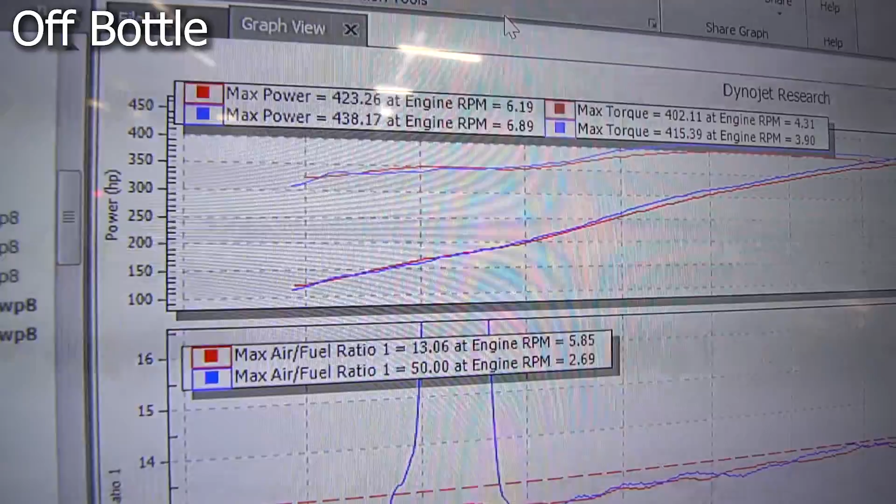101 correction versus a 108. Holy, that's a lot, huh?

Wow, that's nuts. That's why I kept telling him when he dropped it off, I was like, pretty sure it's cold. If you make 15 over what you did before, be happy.

Oh yeah, is this 102 different? Well, look at this.

What am I looking at? Look at the run conditions. Oh yeah, it's like 30 degrees warmer.

That's a solid, that's kicking in. Wow, that's 2 manifolds, that's so crazy though. How, like right here, it's still not making as much as my Camaro LS6. Doesn't make any sense whatsoever.

My car just better keep this trend up when the blower goes on. 700 horsepower, I mean it gets you in the torque. He gives you the torques in the low RPM.

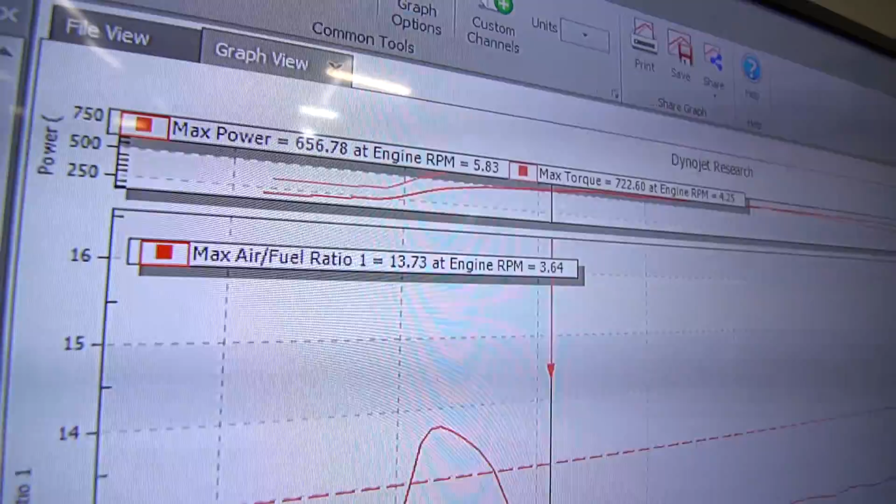This is a good little nitrous can.

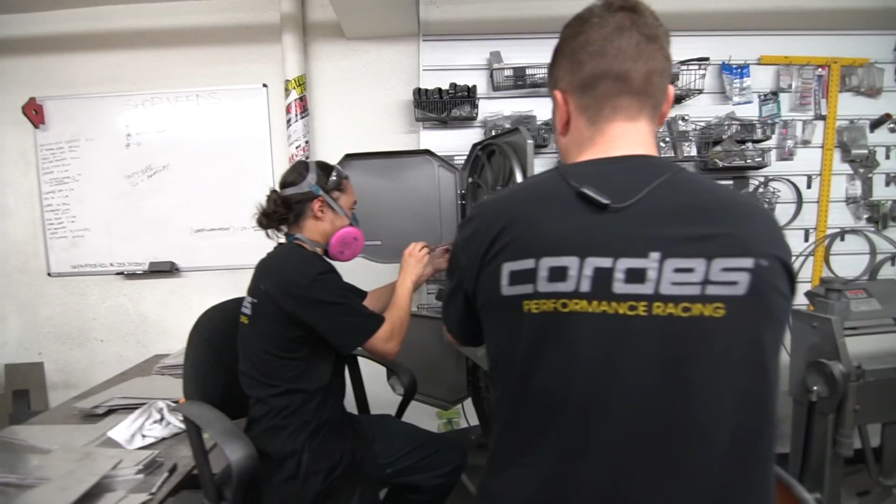This your last batch for a while? Probably not. Yeah, as soon as you make them, they sell out.

I got 10 Trackhawk tanks to make next, and 10 V3 expansion tanks to make next. It's nuts.

You going up the coaters? As soon as I pressure test them all. Gotcha.

Drive this thing. Why is this one so special again, Joe? I don't get it. So this is Eric's second car we're building for him. Bone stock, we secured the car for him. Basically, he said he wanted to do another project.

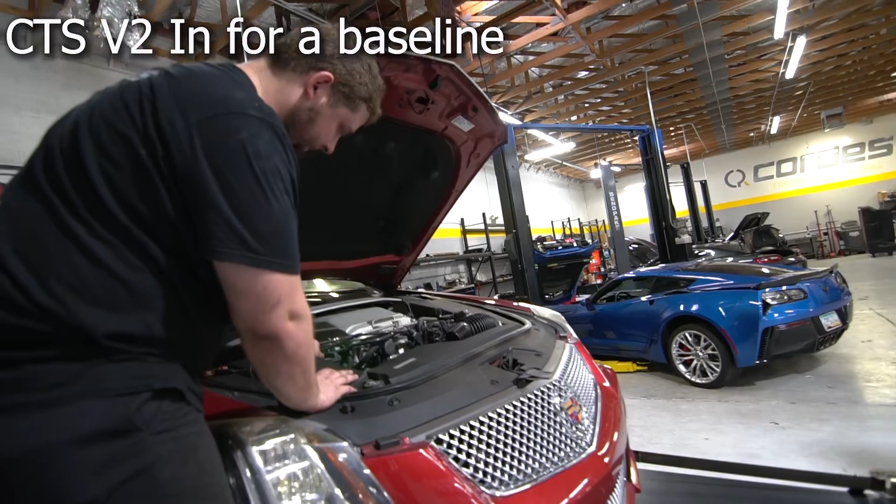This one going full send or whatever? Yeah, it's got 50K on it. Wow, heads, cam, ported blower.

Well, the good news is it's just as easy as a manual, so.

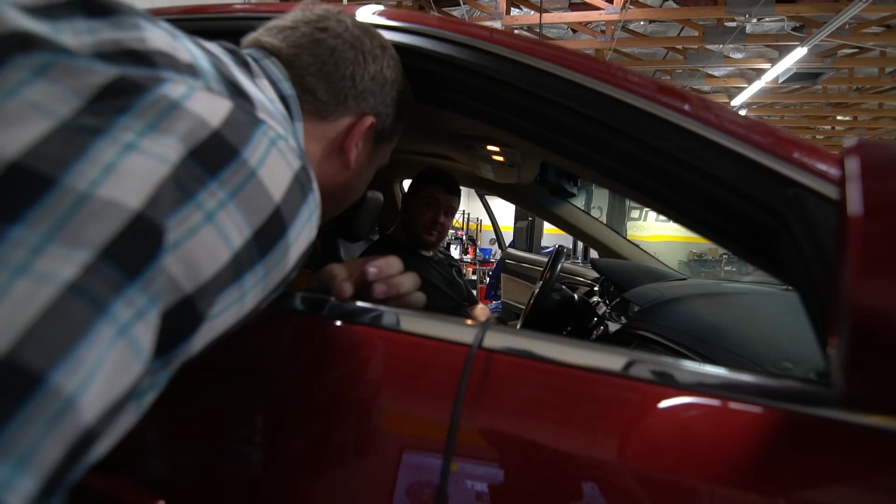Now you put it in sport mode and just upshift into 4th gear. Green button go, red button stop. And make sure you have the traction.

Let her read, bud! I'm gonna go to 180 miles an hour. She's chooching, man.

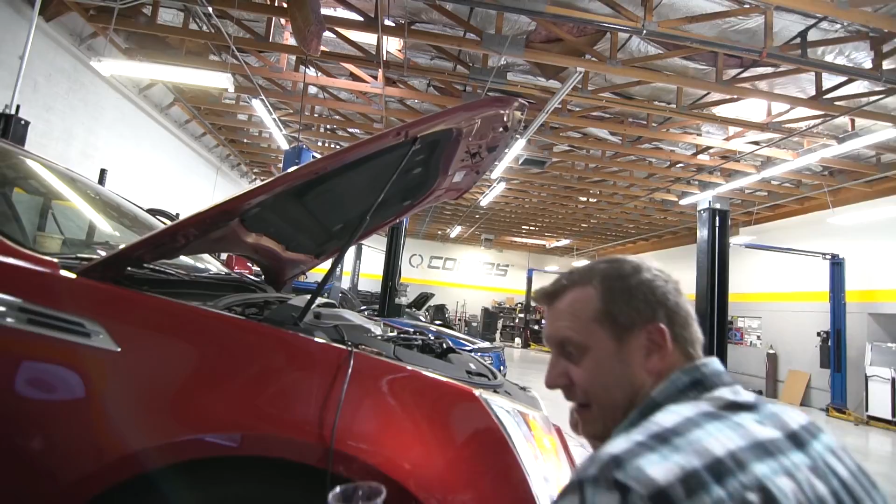Jumping around? Yeah, okay, try that. Center button.

So just turn it on, hit the red button to turn the brake off. Upshift into fourth, get it around 1500 RPM in fourth gear. Hit the green button and stab it. Then when you get up to the rev limiter, hit the red button and start upshifting.

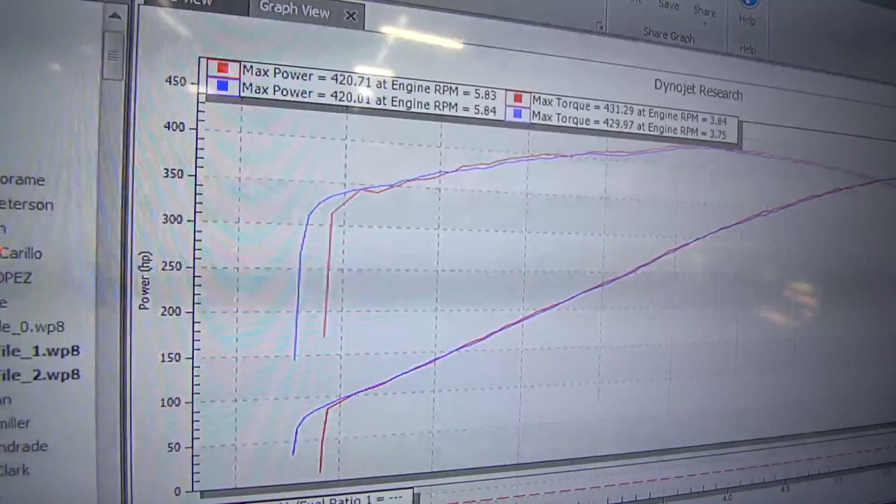Tom's first dyno. What? Tom's first dyno. Not first? Auto. Oh, first auto dyno. I did a C6 a while ago.

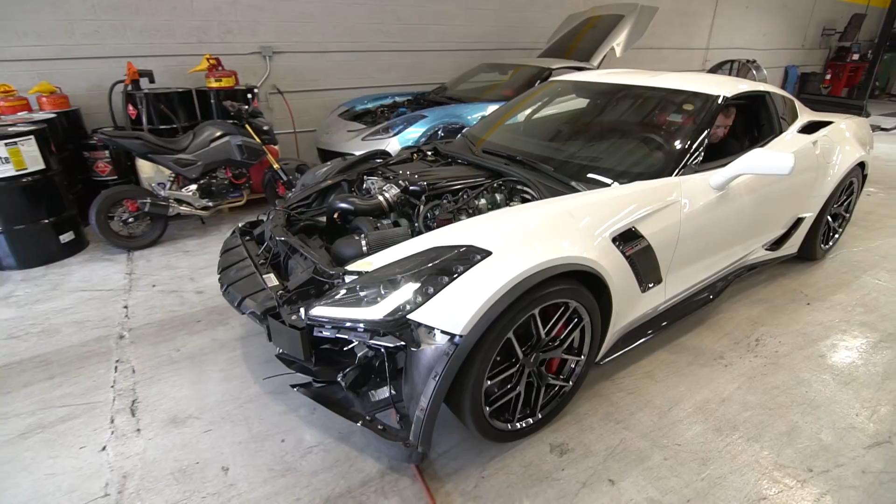So Nick, back on here with this one. Now we've got a check engine light. I don't know what that is. That's good, well you better check the engine then.

Just to recap, this car was built by another shop. They claimed it made like 1100, something like that. We put it on our dyno, made 900-something. Then we dug a little deeper, changed to our air to water, and figured out it has port injection, but the port injection was never actually tuned at all. It looked like if it was running, it was such a small amount of fuel that it was almost inconsequential to the final air-fuel ratio. There was no clear roll-off in the map where you'd normally make the transition to port. It didn't look like it was hardly being used. Well, I guess we'll see what happens now.

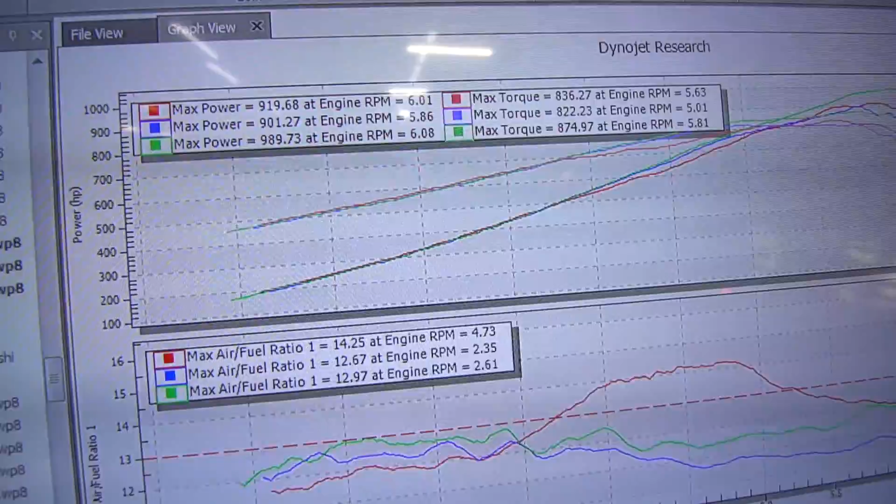Looking a little better now that we're actually starting to use this thing. Before, hardly anything was spraying. Now it's not running out of fuel pressure anymore. It was spraying before, but such a small amount it didn't matter -- maybe enough to not do anything, like it was just the default setting for that kind of thing. I don't know, it just was hardly doing anything. So now we're making some big compensations.

So these air-fuel numbers seem a lot happier. Sure did. But boost is just doing this now -- now we've got belt slip. Better than it was though, it's actually working now.

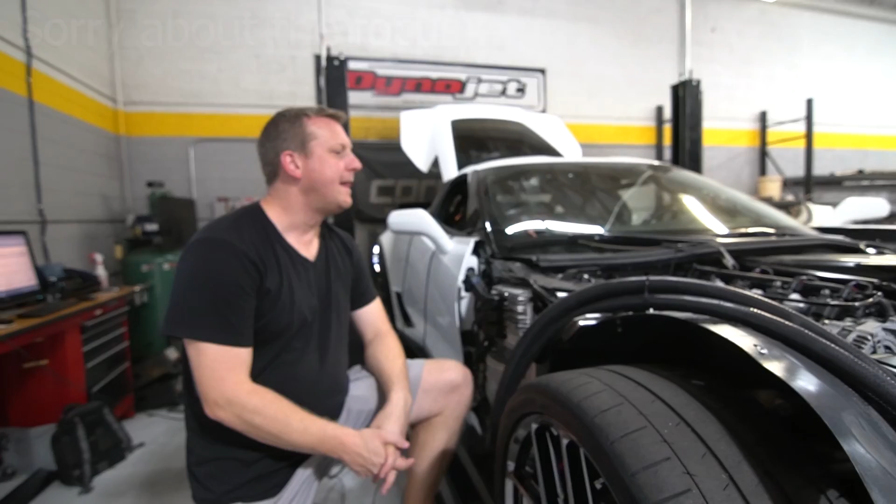Was the intercooler pump on? I think it's been plugged in this whole time. Yeah, so I'm sure that's hot. We've got multiple things going on -- belt slip, and that's really hot. It's doing its job, pulling the heat out, as long as it's not in the water. Doing exactly what it's supposed to.

Somebody want to grab Joe and see if we want to try tightening this belt, or talk to Brian? Because I know we're trying to get data on this thing, but if we've got belt slip, it's not going to be accurate.

Nick, is it data or data? I think it's data, everybody says data or data. I just think data -- number one, Star Trek. Number two, Data East, they used to make all those cool games back in the 90s. Pretty sure it's data, everybody says data. I think they're lizard people, I wouldn't trust them. It's like people who take cold showers, don't trust a word they say -- you gotta have warm blood.

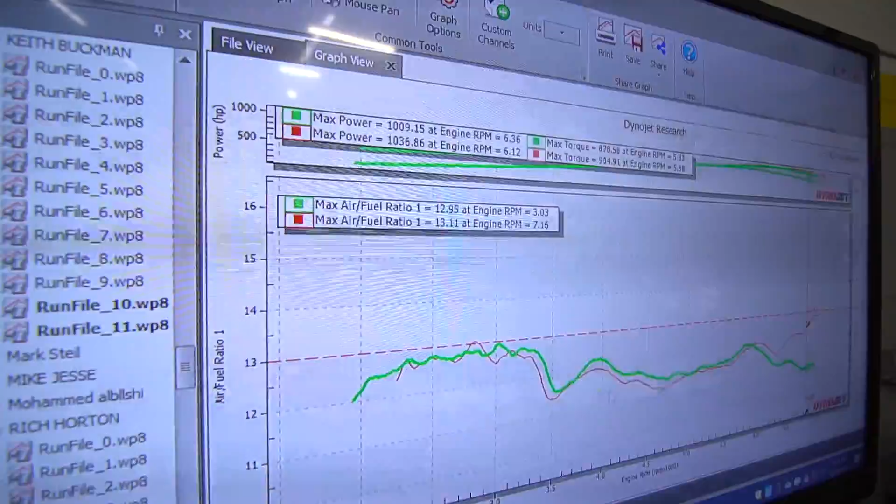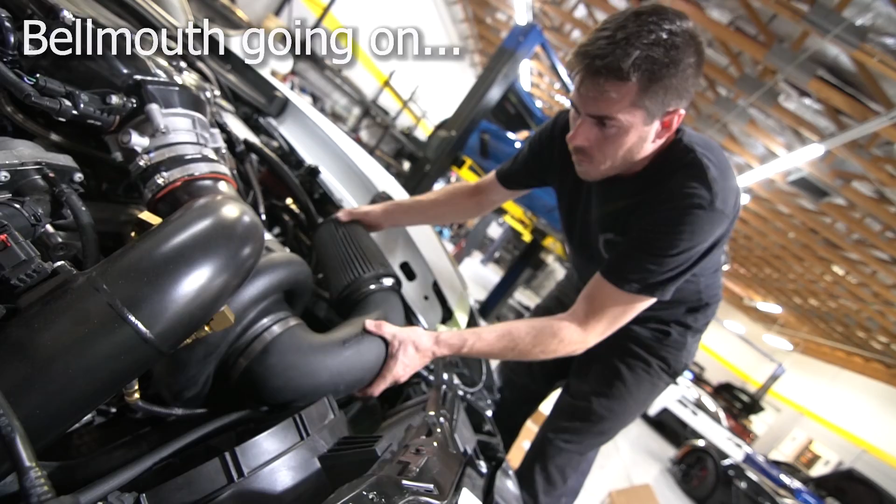What the... is that? That's PCV.

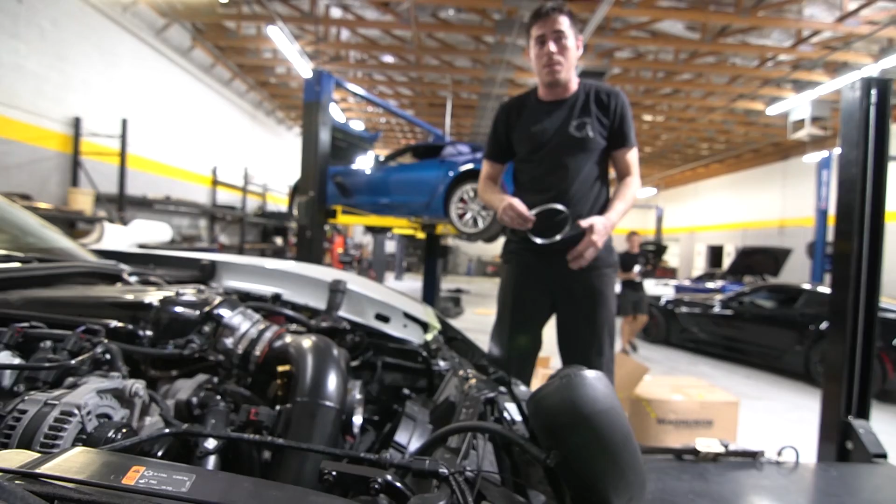Good thing they put a check valve in that in case it reverse boosts. Hey Nick, don't worry, they put a check valve on the PCV hose that goes to the inlet in case the supercharger decides to shoot boost the other way. That'll happen, it's compressor kickback I think they called it. Yeah, it takes you back -- the boosty back boys, yeah, back.

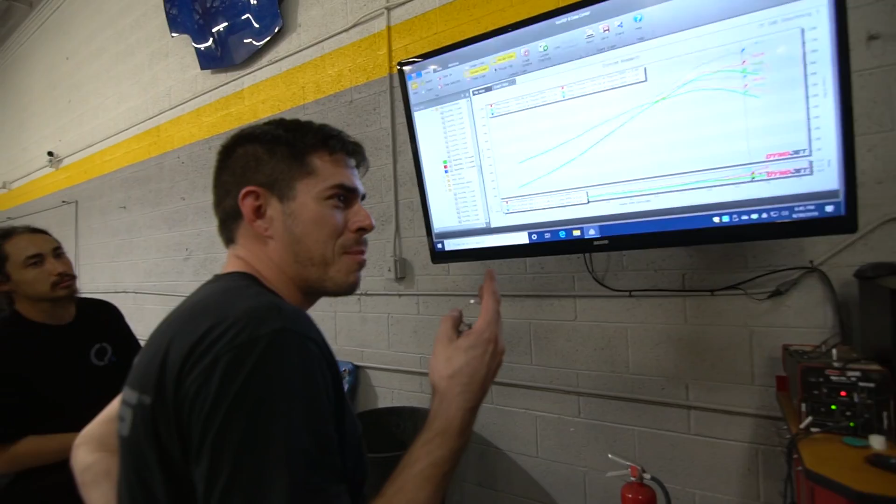Like 100 horsepower -- okay, so he has to never do that. Why, do they run out of fuel or what? Oh yeah, because he's on twin pumps. Well, I didn't see fuel pressure drop, I wasn't looking for that. I just saw the ACM -- for whatever reason the tables are set to max out at 250 kPa, and we just hit 285, so the ACM stopped adding fuel right around here.

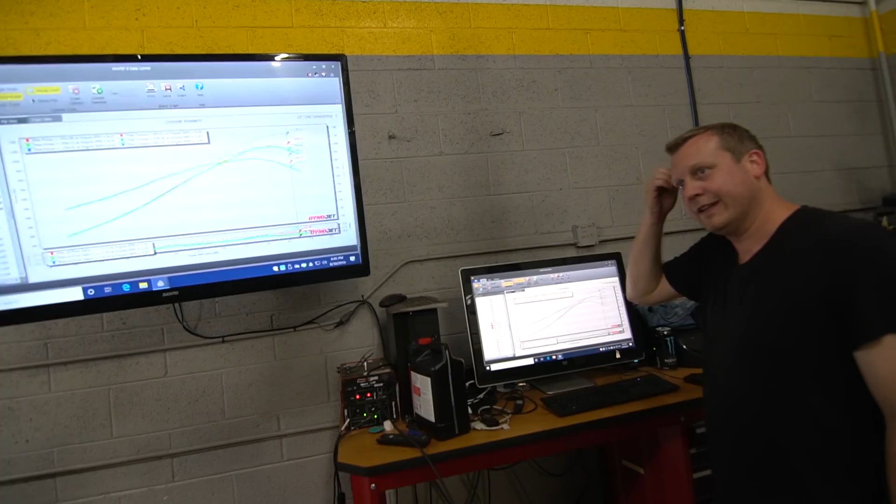But you didn't stop pulling, right? Dude, it happens in a tenth of a second. By the time I'm seeing what's happening I'm like, oh God, oh God. And it was the difference between stopping here and here -- I came up short, yeah, I was like, ah.

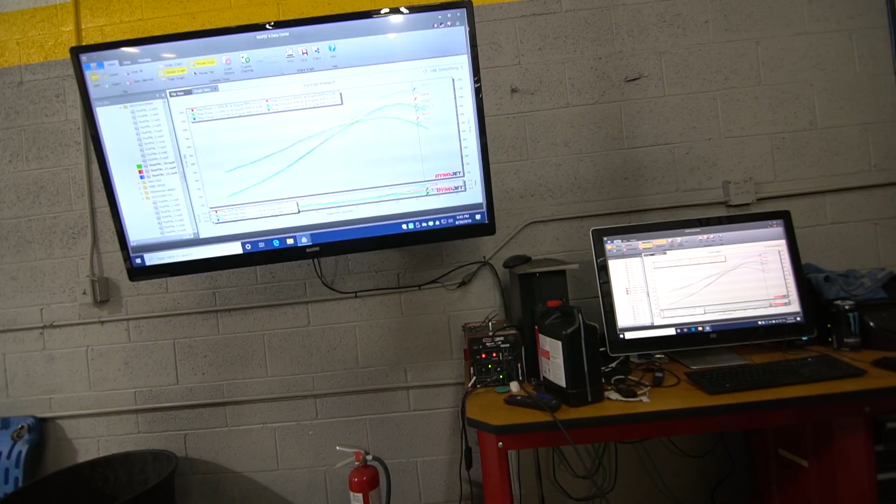Wow. Yeah, all right, I guess we're done.

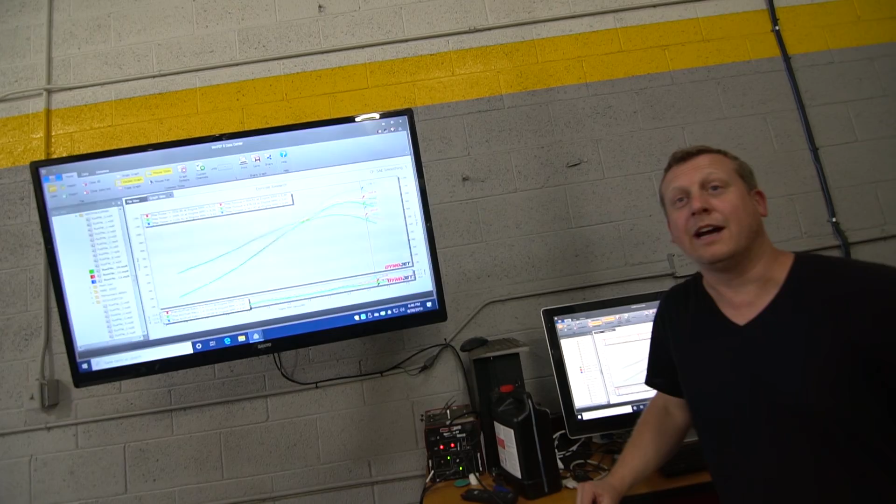And we need to reconfigure the ACM if it would stop crashing. I tried to switch it and I can't do it, it keeps locking up. So it would totally make 1150 like they said, with our air to water and the ACM working and a better tune, with all the stuff they didn't have on it before. Yeah, so we need to put that filter back on.